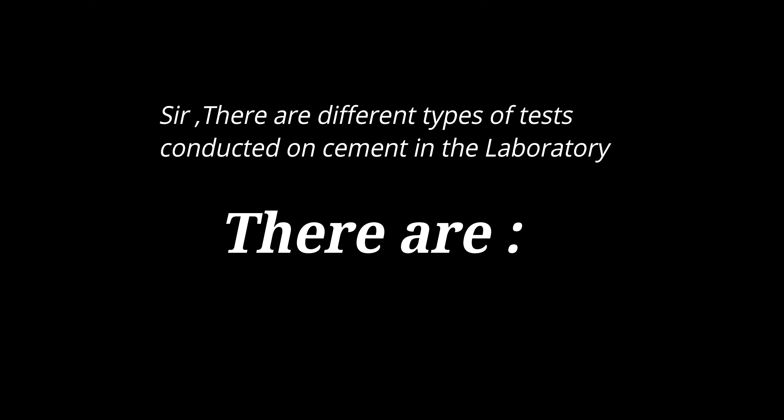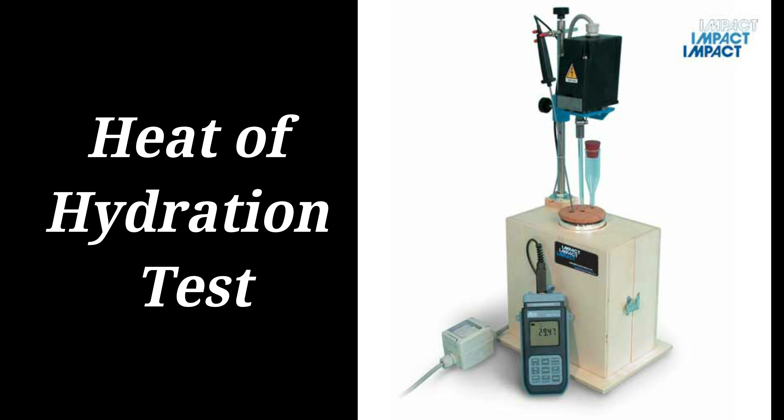The interviewer asked his fourth question, that is, "Tell me the test conducted on cement in the laboratory." The engineer said, "Sir, there are different types of tests conducted on cement in the laboratory. There are fineness test, consistency test, setting time test, strength test, soundness test, heat of hydration test, and tensile strength test, and chemical composition test. These are some of the important tests conducted on cement, sir."

Coming to our fifth question, "What is the initial setting time of cement?" The engineer said, "Sir, according to Vicat's apparatus, it is 30 minutes."

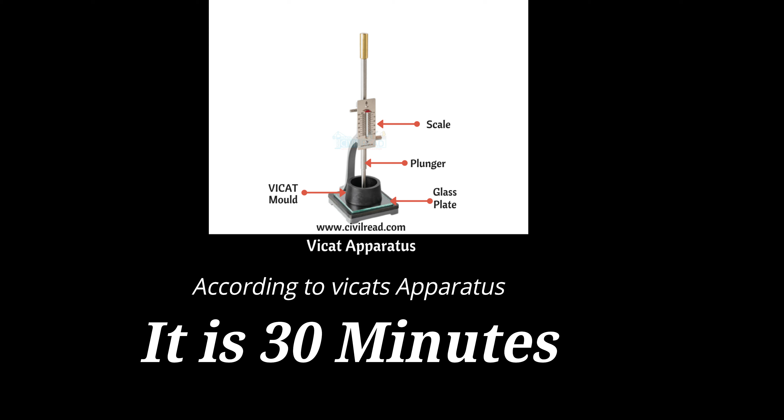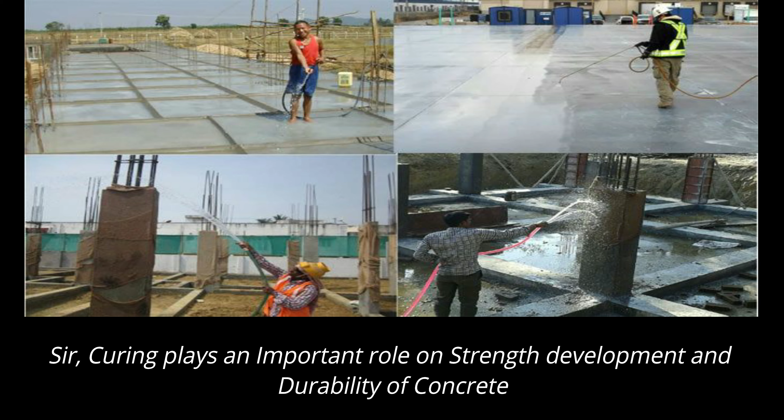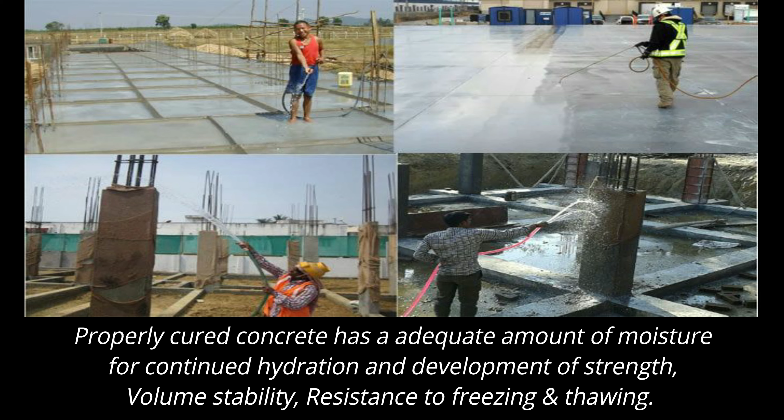Then the interviewer asked, "Why curing is required for cement?" The engineer said, "Sir, curing plays an important role on strength development and durability of concrete. Properly cured concrete has an adequate amount of moisture for continued hydration and development of strength, volume stability, and resistance to freezing and thawing. The basic reaction is, sir, when the calcium, that is limestone contained in the cement, reacts with water, it forms calcium hydroxide and it liberates heat. This heat is called heat of hydration, sir."

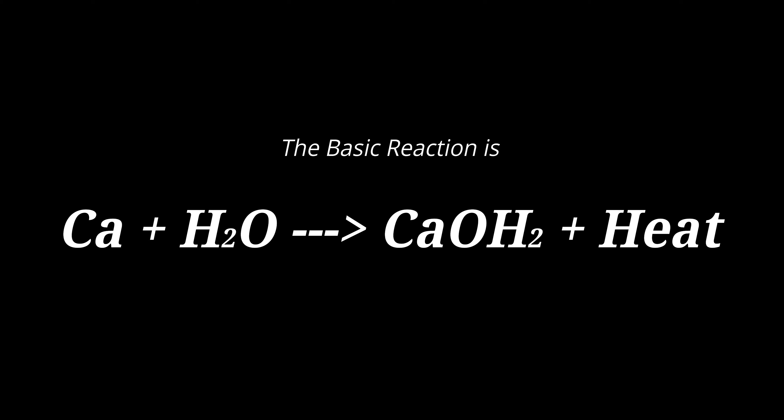The interviewer asked his seventh question, "What is meant by workability of concrete?" The engineer said, "Sir, workability of the concrete is the property of freshly mixed concrete which determines the ease and homogeneity with which it can be mixed, placed, consolidated and finished."

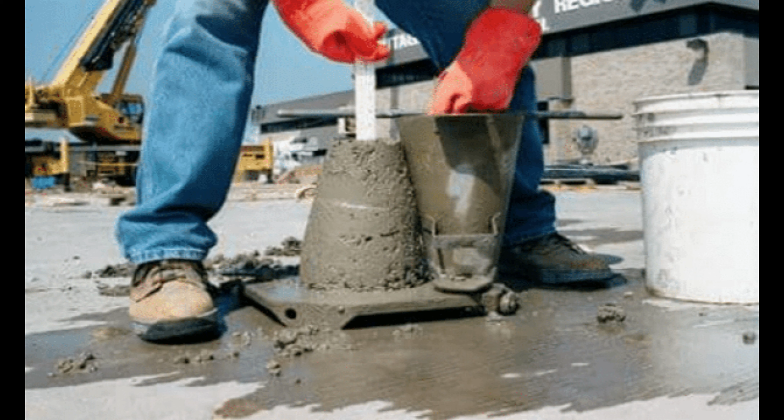The interviewer asked his eighth question, "What are the tests to be conducted to determine the workability of the concrete?" The engineer said, "Sir, it is by slump cone test."

The interviewer asked, "What is the height of the slump cone?" The engineer said, "Sir, it is 300 mm height, sir."

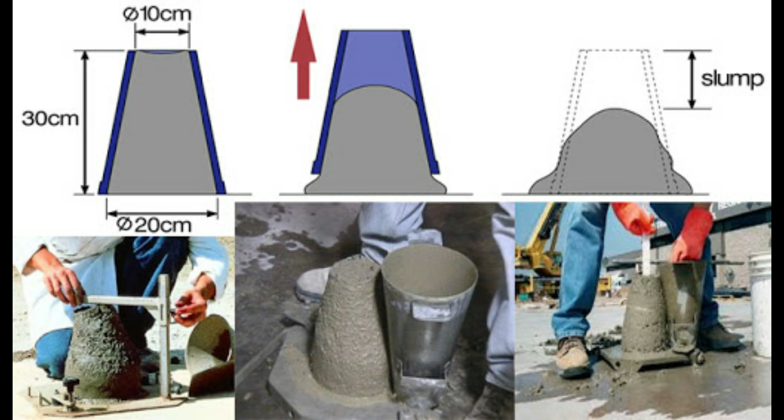The interviewer asked, "What is the dia of the rod which is used for the tamping of the concrete?" The engineer said, "Sir, it is 16 mm dia rod which is used for the tamping of the concrete."

The interviewer asked his next question, that is the 10th question, "What are the factors affecting workability of concrete?"

The engineer said, "The workability of the concrete depends on materials such as water content, cement content, sand, and aggregate properties such as size, shape, grading, mix design ratio, and the use of admixtures. Each and every process and material involved in the concrete mixing affects the workability of the concrete, sir."

The interviewer asked his 11th question, "What is steel?" The engineer answered, "Steel is a building material used for building structures. It is an alloy of iron and carbon. Generally, the carbon content ranges up to 2%, sir."

The interviewer asked his 12th question, "What are the available diameters of the steel?" The engineer answered, "The available diameters of the steel are 8 mm, 10 mm, 12 mm, 16 mm, 20 mm, 25 mm, 32 mm, and 40 mm."

The interviewer asked his 13th question, "Okay, you know about the diameters. Do you remember what is TMT?" The engineer answered, "TMT means thermomechanically treated bars."

"Why is steel only used in RCC? Why not other metals?" The engineer answered, "Sir, steel is the only metal which has a coefficient of linear expansion equal to that of concrete. Because of that property, steel is used as a reinforcement in RCC."